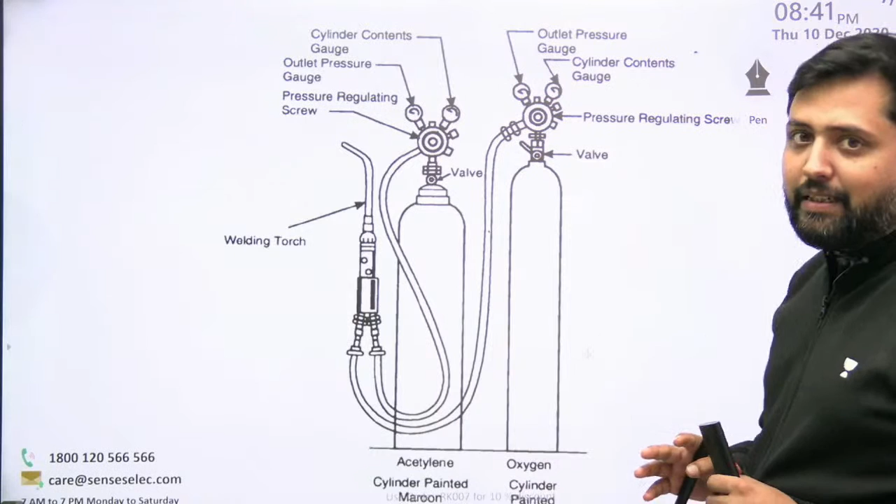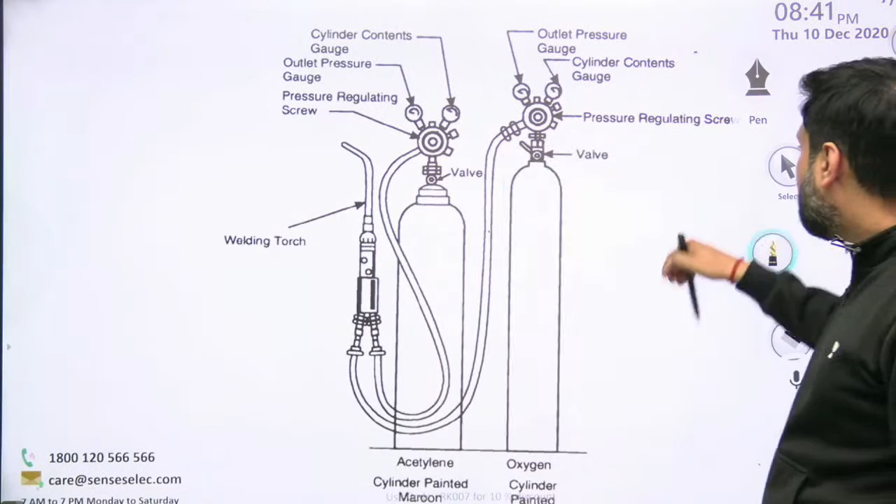That oxygen cylinder will be made black in color. Okay, here right now if you look, this is the oxygen cylinder, this will be made black in color. And if you look at the acetylene cylinder, then the acetylene cylinder will be made red or maroon in color.

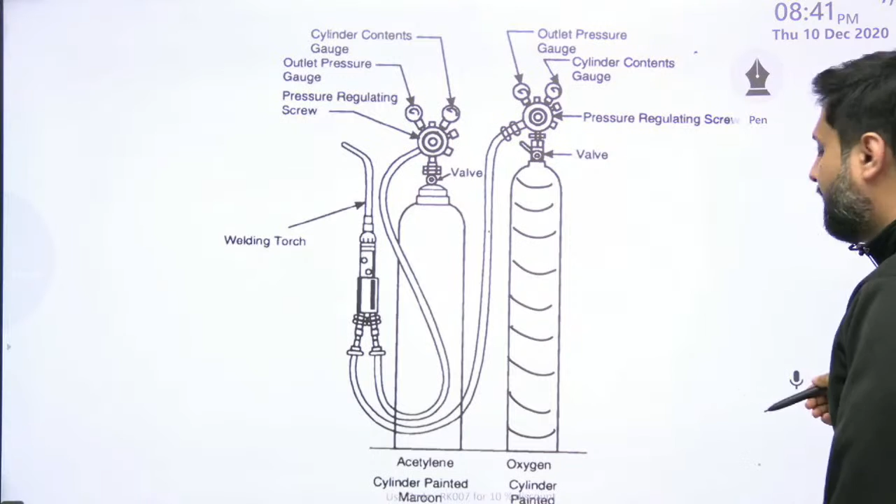Moreover, the oxygen gas is stored in this cylinder, and this cylinder will be made out of brass. You cannot make the oxygen cylinder out of steel, because the problem is if you made it out of steel, it will corrode and the life of the cylinder will be too less. So instead of making it of steel, it is made out of brass.

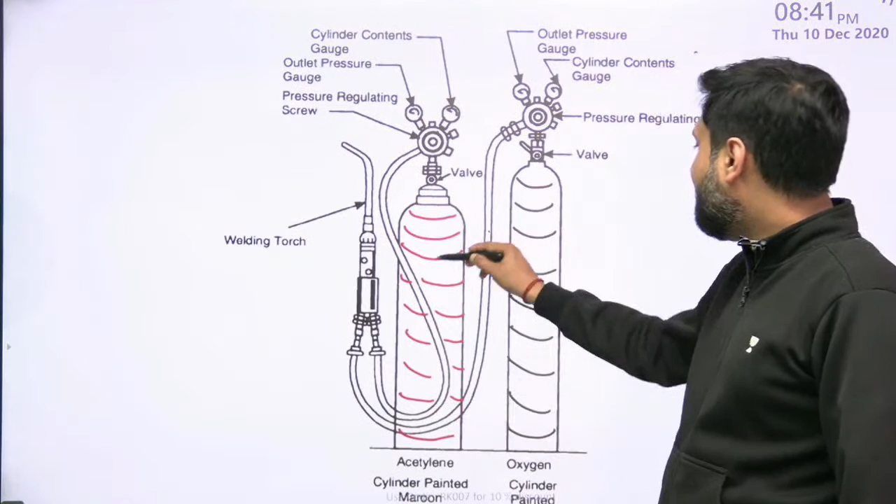While this acetylene cylinder will be red in color and it will be made out of steel. You cannot store the acetylene gas in a brass cylinder because acetylene in itself is highly flammable and explosive. And once you store it in a brass cylinder, it will react with copper and form cuproacetylene, which is further very highly explosive in nature.

So dear students, this acetylene cylinder, which is made red or maroon in color, is made out of steel, and that oxygen cylinder is made out of brass, because if you store oxygen in a steel cylinder, it will corrode it and the life of the cylinder will be very less.

Moreover, how do we get oxygen? Oxygen is actually filtered out from the atmosphere. We take the atmospheric air, we first do the cleaning so that we can remove all those small impurities and particles, dust, everything from it. Thereafter, we heat it in a chamber. Once you heat it, then what will happen?

The lighter gases will go on top, the heavier ones will come to the bottom, and then one by one the valves will be opened so that lighter gases go out, heavier gases go out, and we are left with the three gases which are argon, nitrogen and oxygen.

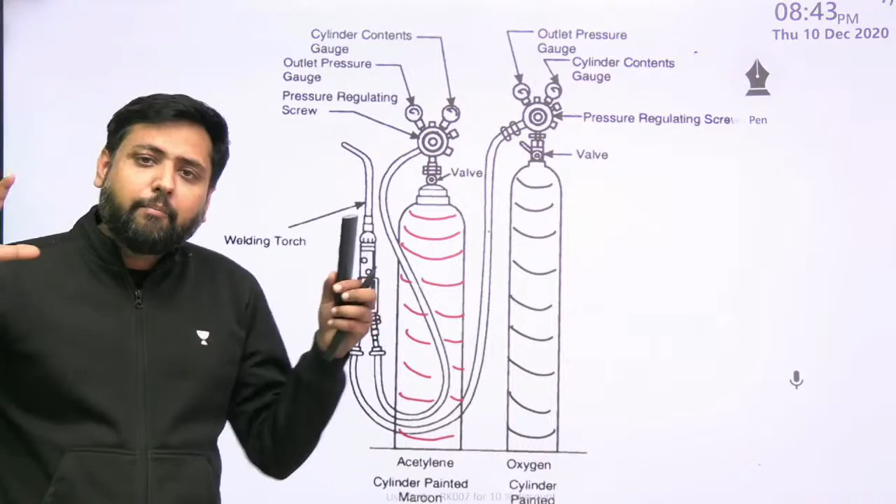Now, these gases are sent into a compressor. In that compressor, it is compressed a lot. Once that compressing part is over, then the gases are intercooled. They are cooled a lot, and then they are throttled. Once you do this throttling, you will get liquid nitrogen, liquid argon and liquid oxygen.

Out of all the three, oxygen will have the highest boiling point. So now this liquid mixture of nitrogen, oxygen and argon will be heated in a controlled way, so that first nitrogen evaporates out, then argon evaporates out, and you are left with liquid oxygen, which will be stored inside this cylinder.

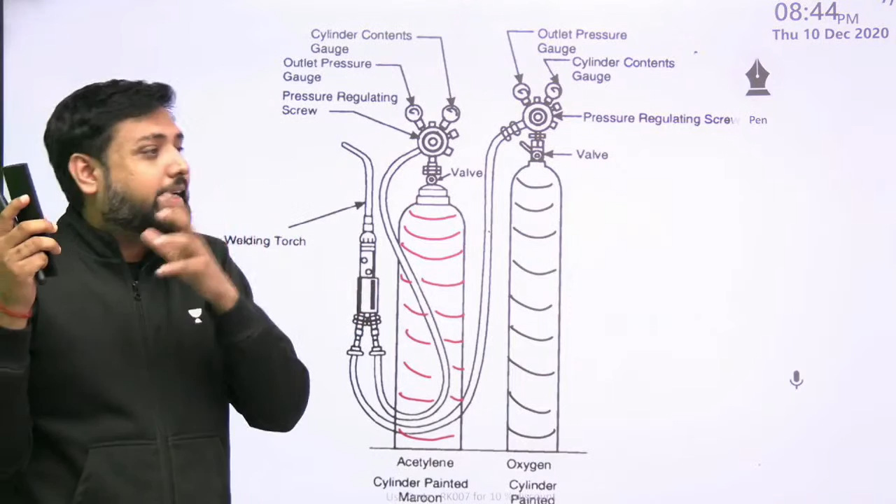How to get the acetylene? We take calcium carbide and react it with water, and that reaction results in the formation of acetylene gas. But the problem with acetylene gas is that it can explode under its own weight.

So acetylene cannot be stored directly into a cylinder. For that, the cylinder in which you are going to fill the acetylene gas under pressure will first be filled with porous calcium silicate. Into those pores, acetylene gas can enter, so that all the gas molecules will not be at the same place and explode.

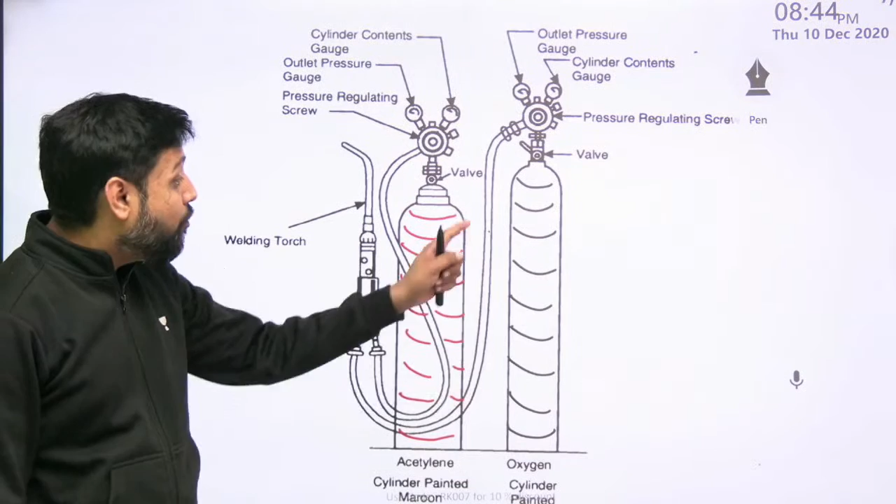Then the remaining space is filled with a liquid called acetone, and acetylene gas is filled into it at a pressure of about 1.3 to 1.4 megapascal, while the oxygen cylinder pressure can be between 12.7 and 13.8 megapascal. Acetylene is always stored in liquid form because more volume can be accommodated in the same cylinder.

This is the setup. You will have pipes coming out from these cylinders. This is the oxygen cylinder. From here, a copper pipe comes out, and from the acetylene cylinder, a rubber pipe comes out, and both of these pipes go into the welding torch shown here.

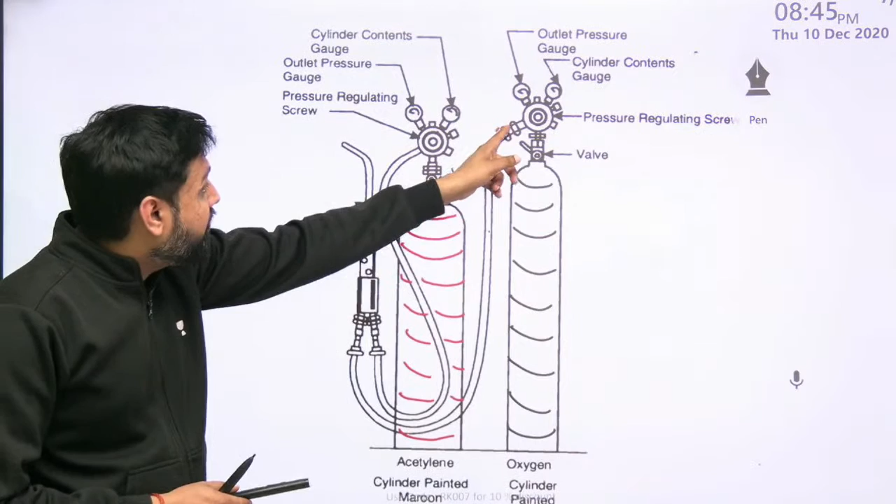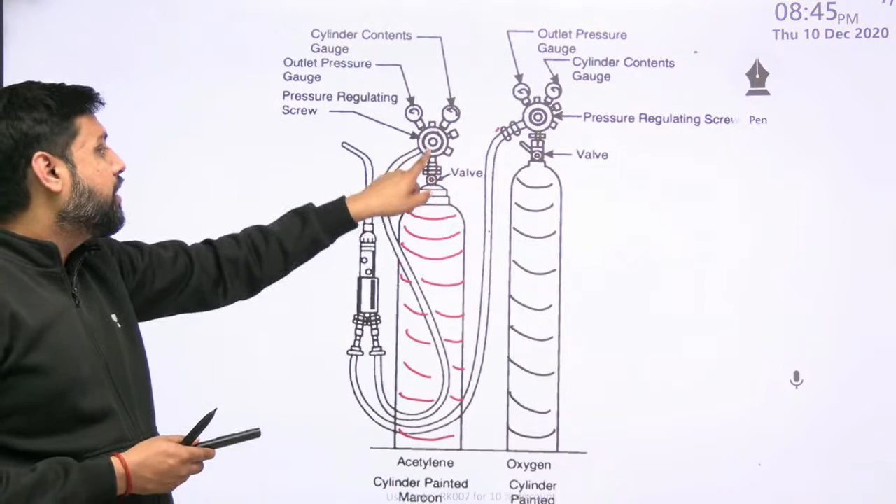The threads where these hoses and pipes are fitted will also be different. Because suppose by mistake this copper pipe fits into the acetylene cylinder, then acetylene will react with copper and it will explode. That can be very fatal for the welders.

So the American Compressed Gas Association, which studies all these compressed gases, decided to change the threads, because a left hand thread will fit with a right hand thread only, or a right hand thread will fit with a left hand thread only.

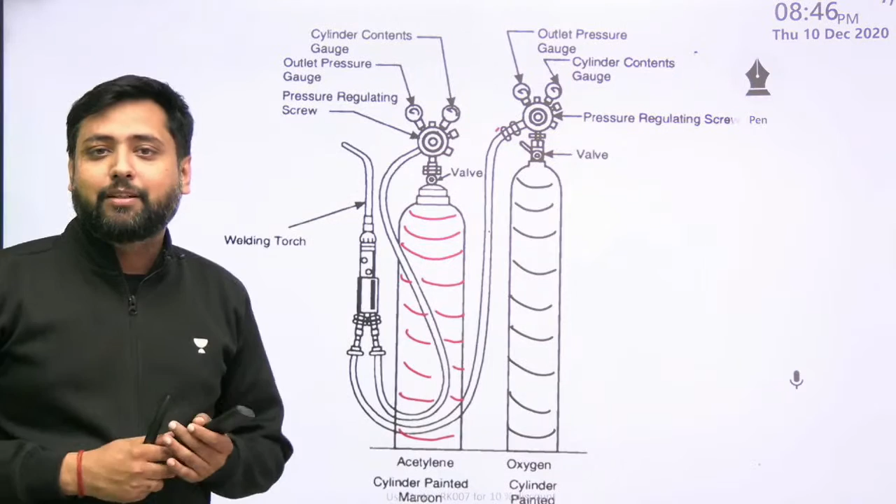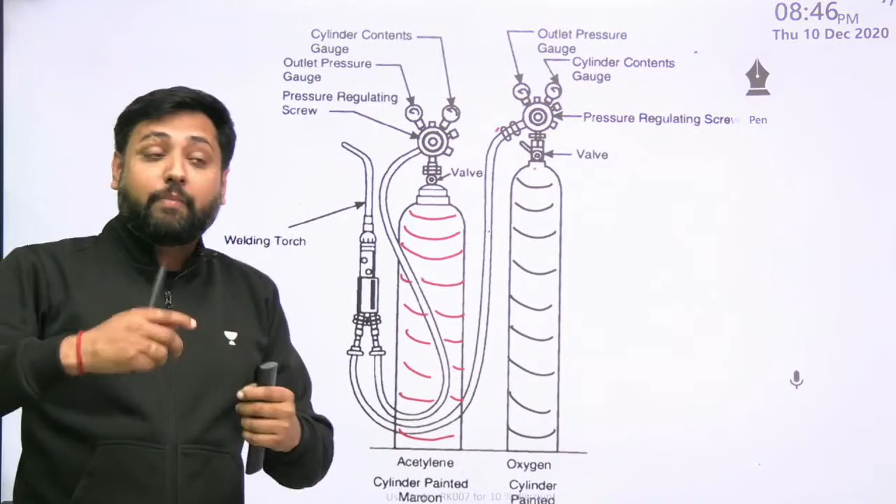So if we make a left hand thread on the oxygen cylinder, this pipe will always have a right hand thread, and the acetylene cylinder will always have a right hand thread. So by mistake you cannot fit it wrong, which keeps the welder safe. Otherwise an explosion can even result in the death of the welder or people nearby.

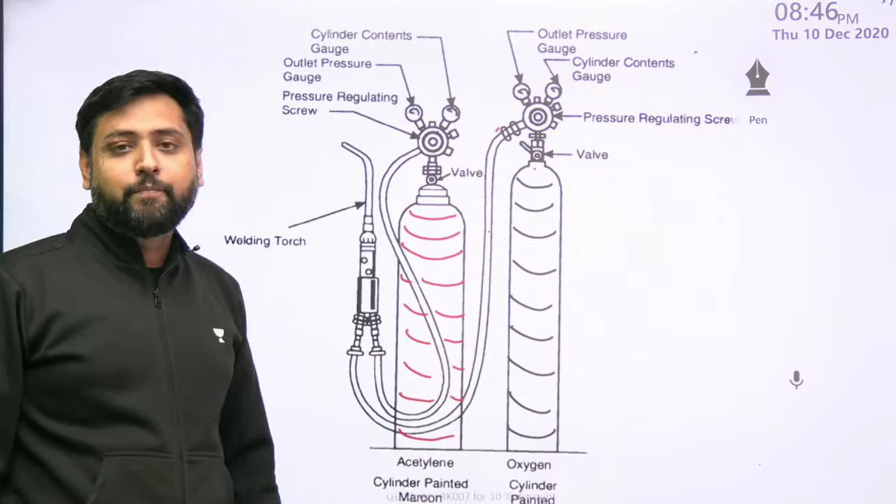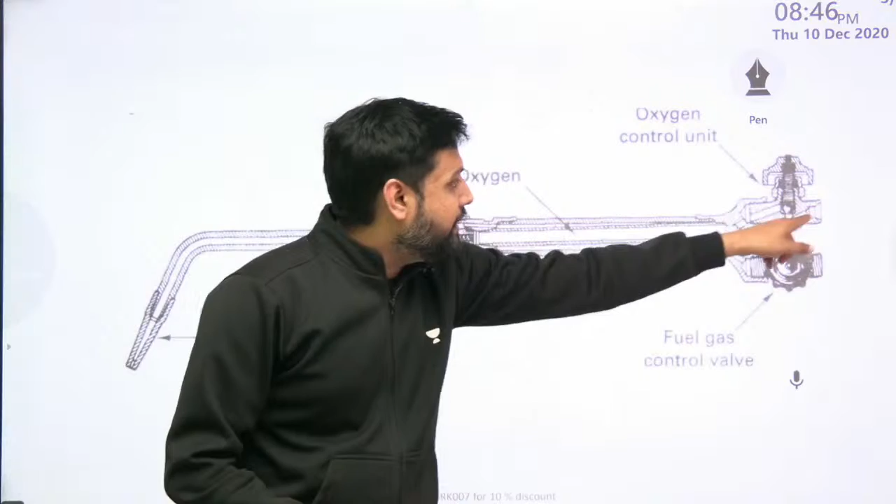This is the setup. Now you have this torch. In this torch, from one side oxygen gas comes in, and from another side acetylene gas comes in, and here you can see the mixing chamber.

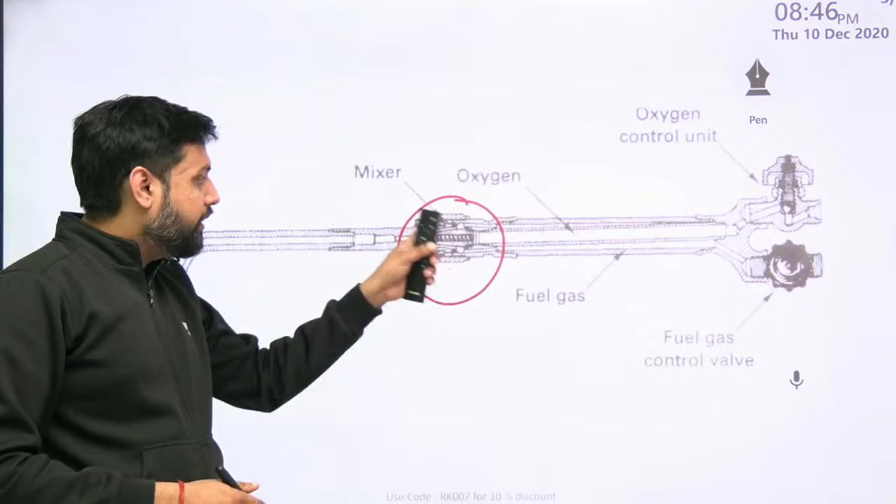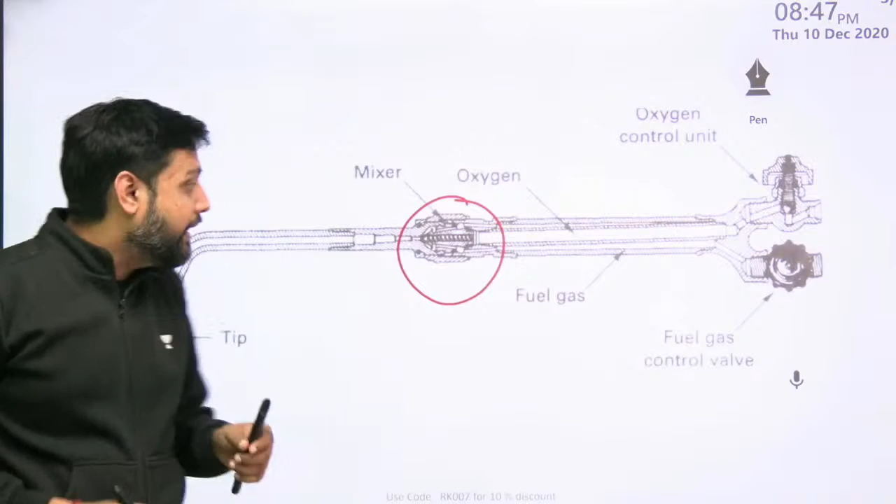This mixer will be a chamber with a diverging shape, not converging, so that pressure increases and mixing occurs thoroughly. Then this mixture passes through and at the tip it becomes convergent, because under the expense of pressure, that mixture of acetylene and oxygen comes out at higher velocity, and then you can simply light it and get this flame.

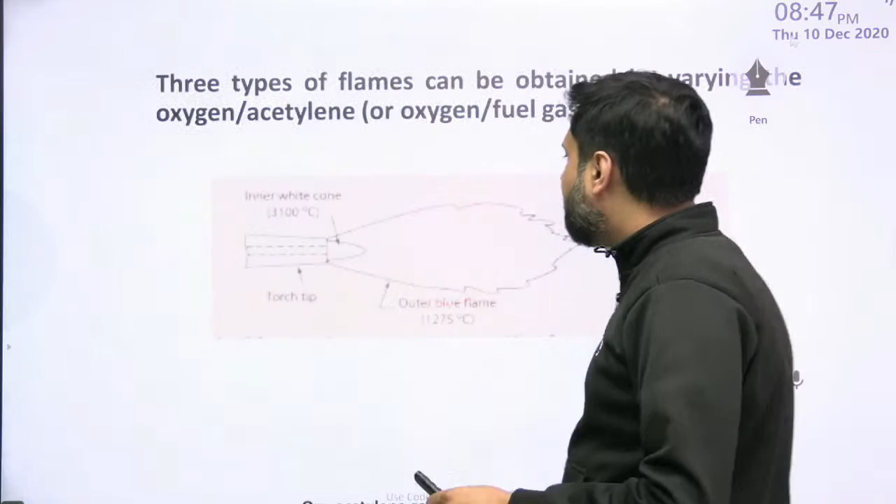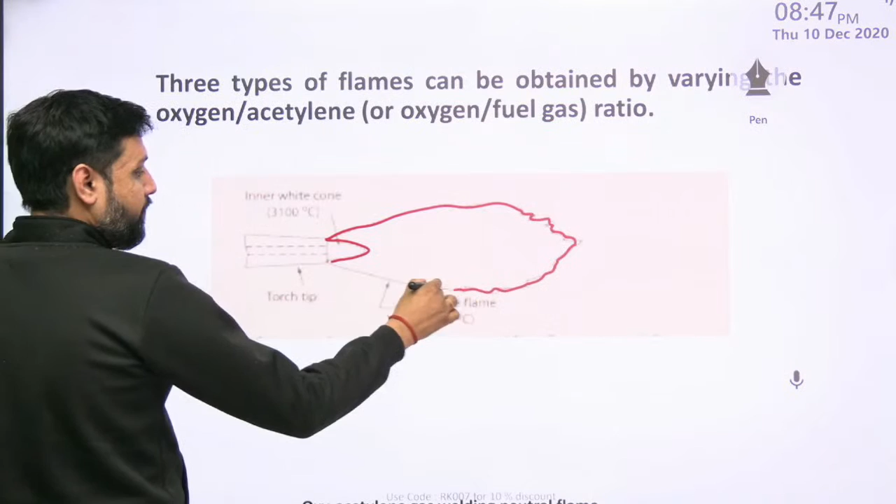If you look at the flame, it can be visualized like this. There is an inner cone of the flame and an outer cone of the flame. When these gases come out, the mixture of acetylene and oxygen, you know what happens?

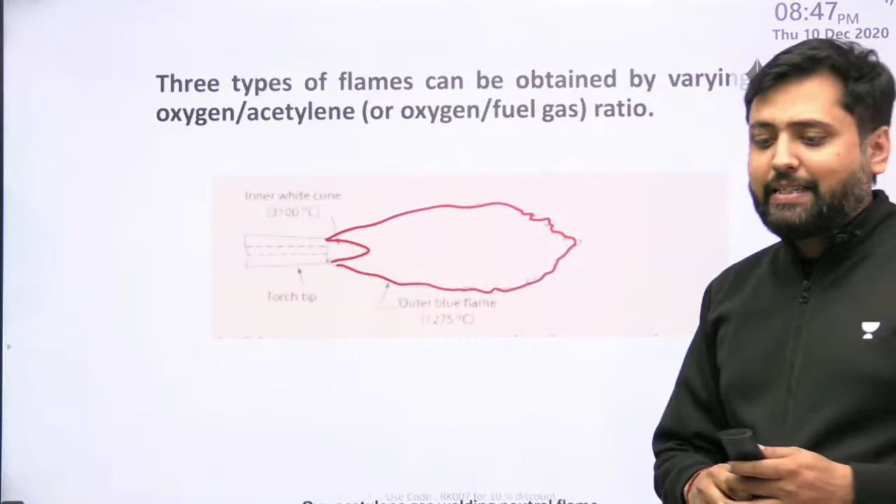The acetylene gas burns in the presence of oxygen in two stages. What are those stages? Let me show you. In the first stage, what happens?

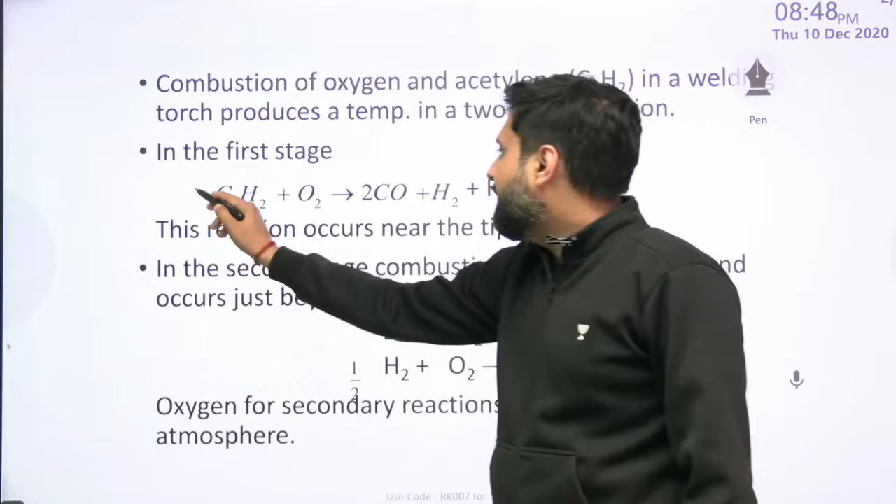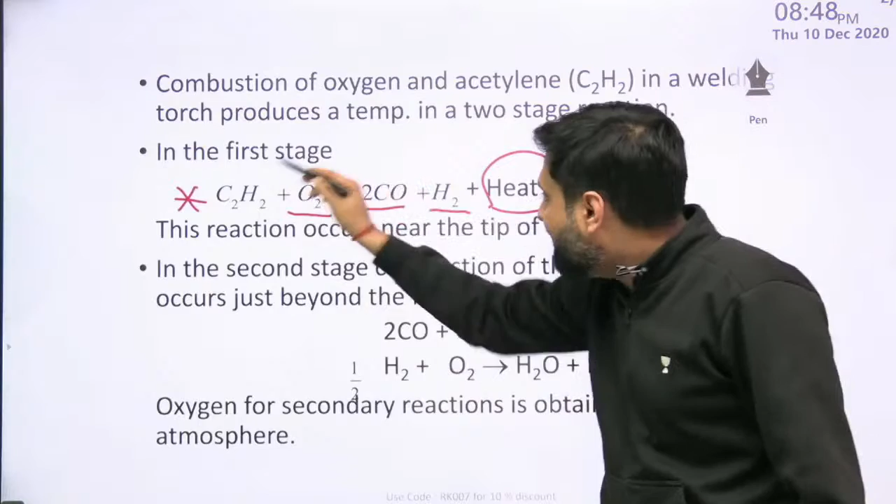This acetylene gas burns in the presence of oxygen supplied from the cylinder. In the presence of this cylinder oxygen, C2H2 burns and produces carbon monoxide and hydrogen gas, plus heat is generated, and this burning results in the formation of the inner cone.

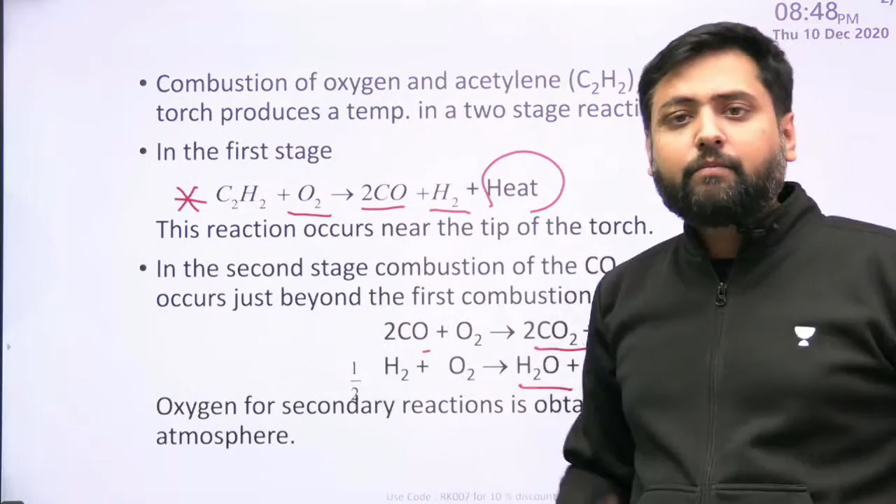Then in the second stage, 2CO plus O2 forms carbon dioxide, and hydrogen and oxygen form water vapor, then heat. This is the second stage reaction, and whatever oxygen is required here is not obtained from the cylinder, but from the atmosphere.

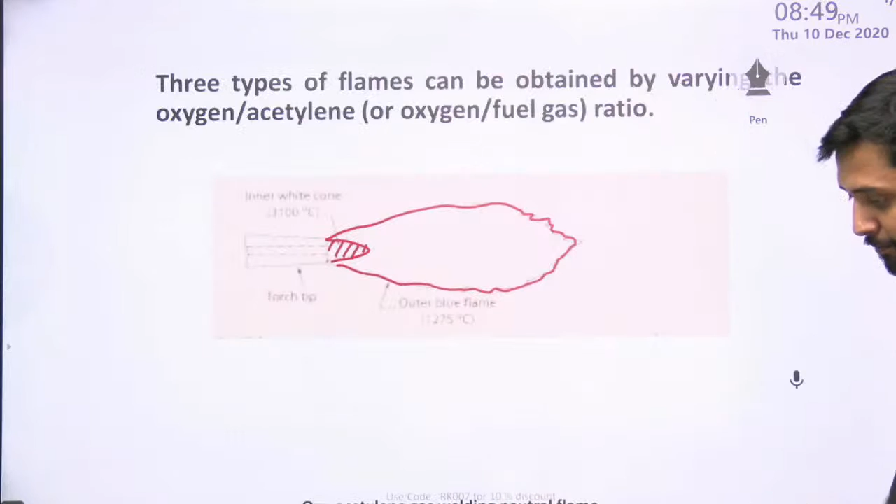This second stage reaction results in the formation of the outer cone. Now, the temperature at the inner cone and the outer cone will depend upon the ratio of acetylene to oxygen that you have used.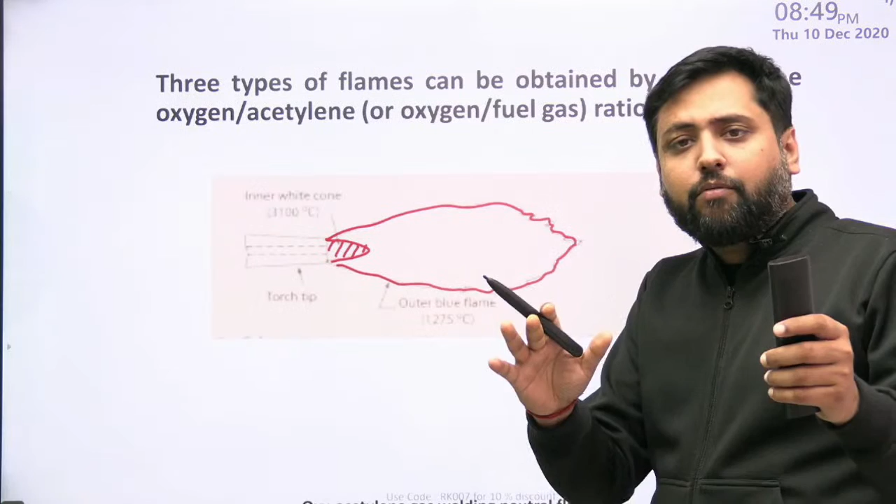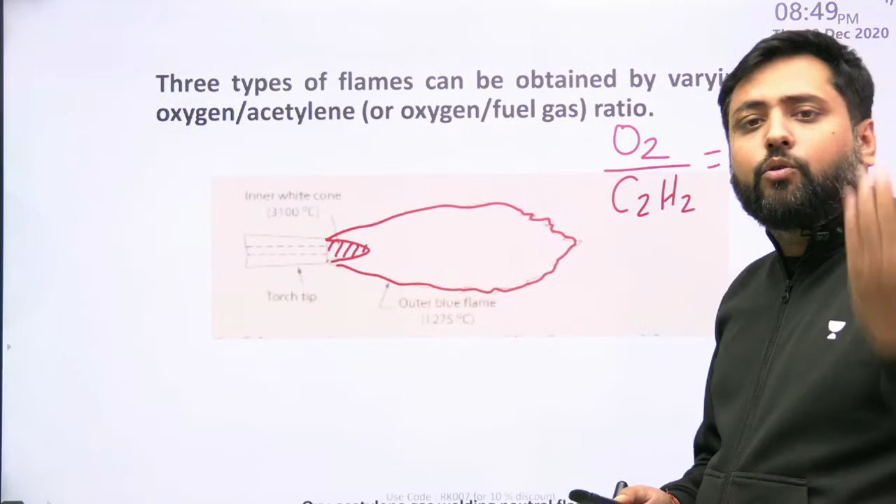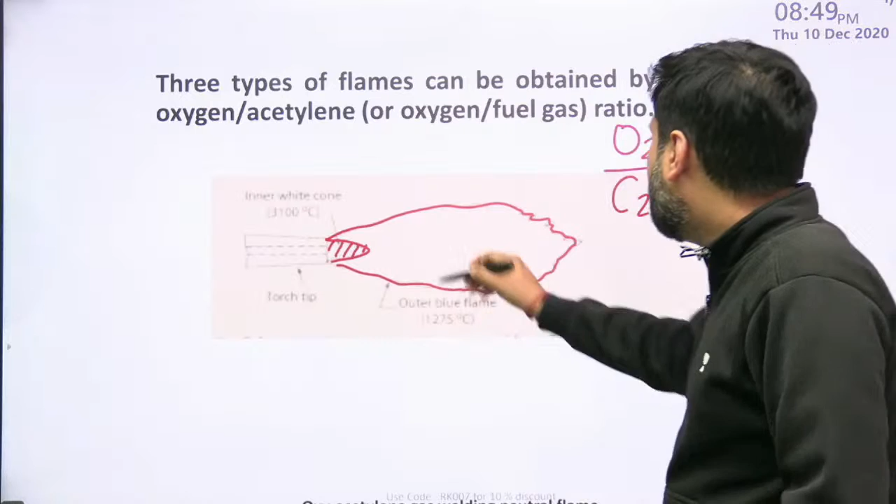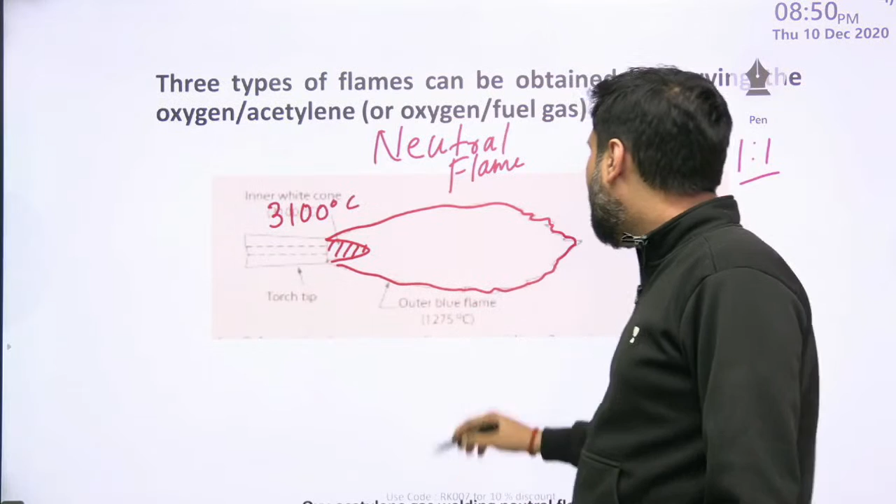Suppose you are using the same amount of oxygen and acetylene, a 1:1 ratio. Then this type of flame will be called a neutral flame. Since enough oxygen and enough acetylene are present and equal in amount, there will be no extra carbon or oxygen after the reaction completes. This neutral flame will never carburize nor oxidize the region being welded, so it is the one flame which is mostly preferred. In case of neutral flame, the temperature at the inner cone will be about 3100 degrees centigrade, while the temperature at the outer cone will be about 1275 degrees centigrade.

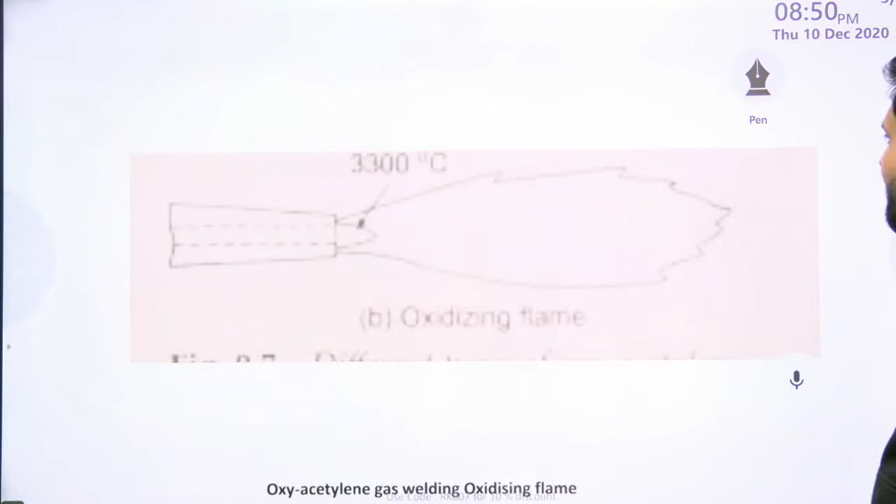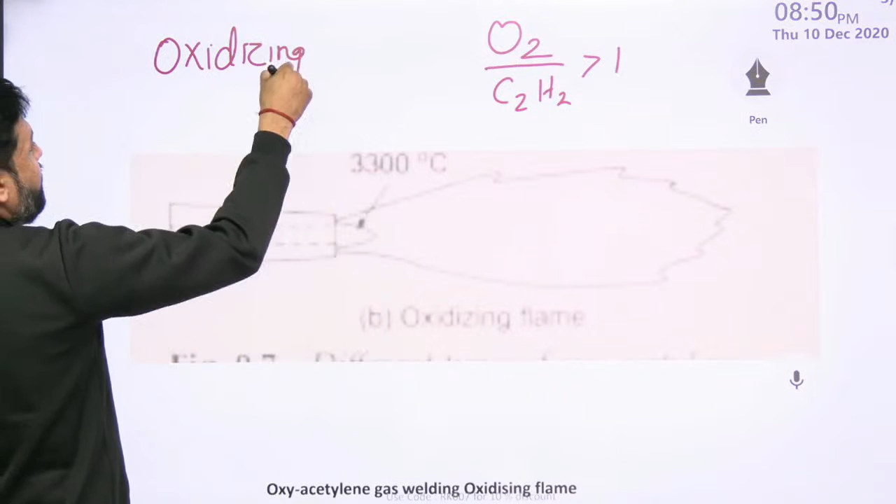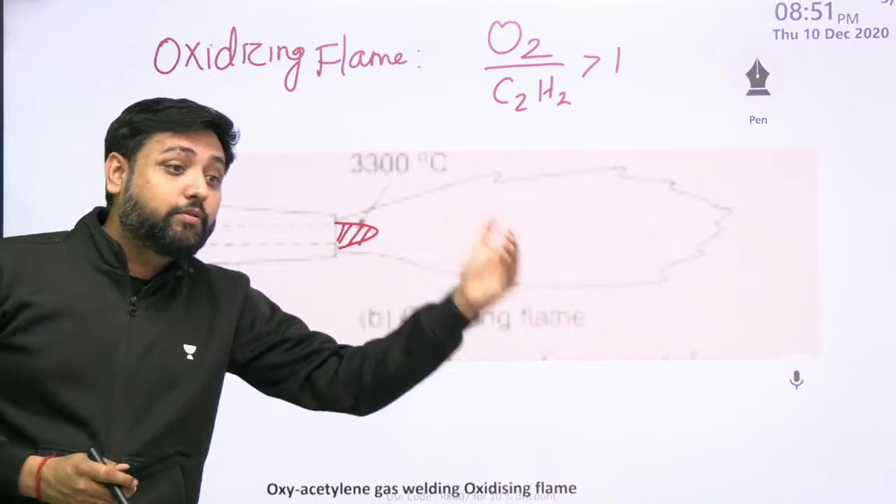Now suppose O2 is more and C2H2 is less, so this ratio is greater than 1. This type of flame is what we call an oxidizing flame. In this case, oxygen will be more, acetylene will be less, and reactions will happen at a faster rate. The inner cone length, compared to the neutral flame, will also be very small compared to the neutral or carburizing flame. Why? Because more oxygen is there, burning happens at a higher rate, so the inner cone length will reduce.

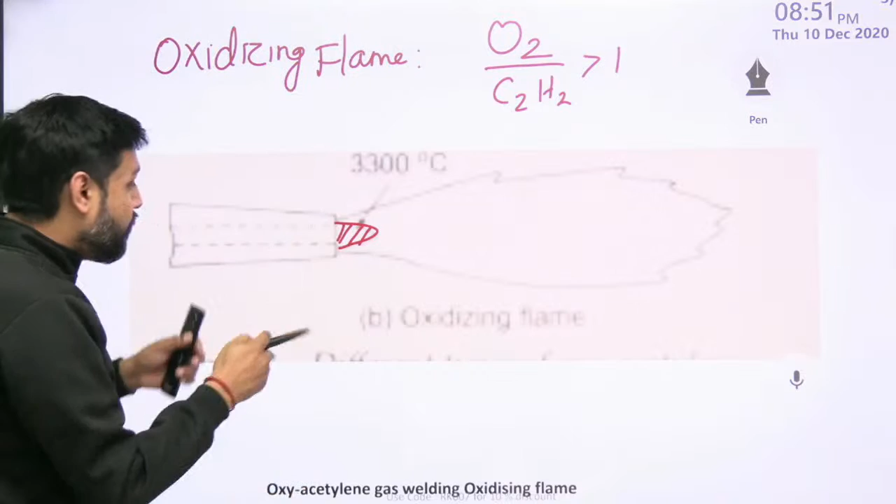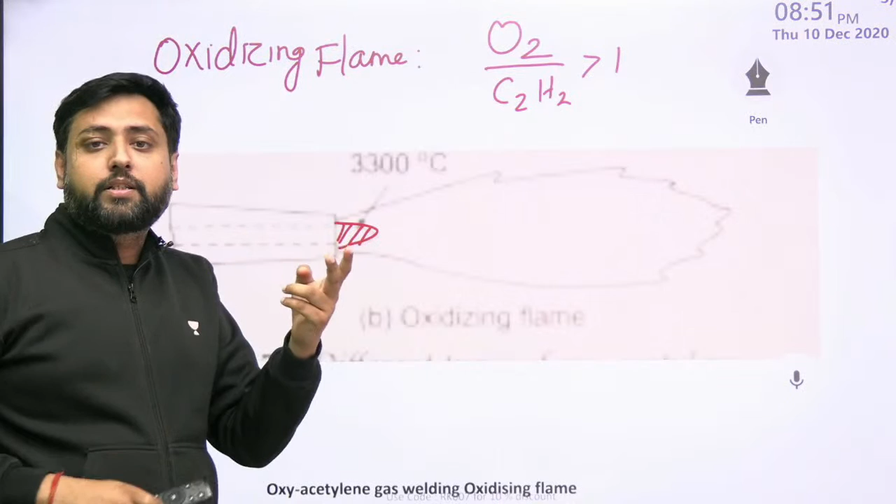Since burning is happening at a very high rate, the temperature at the inner cone will be the highest out of all three flames: carburizing, neutral, and oxidizing. Here the temperature can be as high as 3300 to 3400 degrees centigrade, while the temperature at the outer cone will be about 1350 degree centigrade.

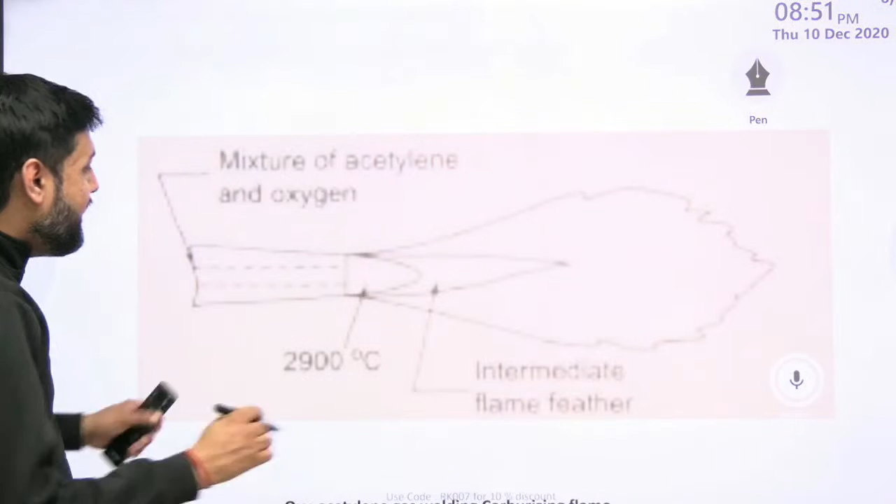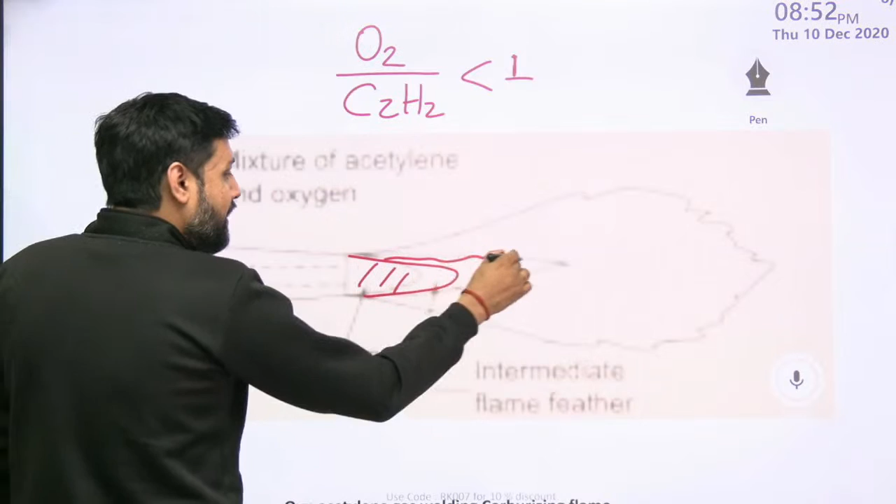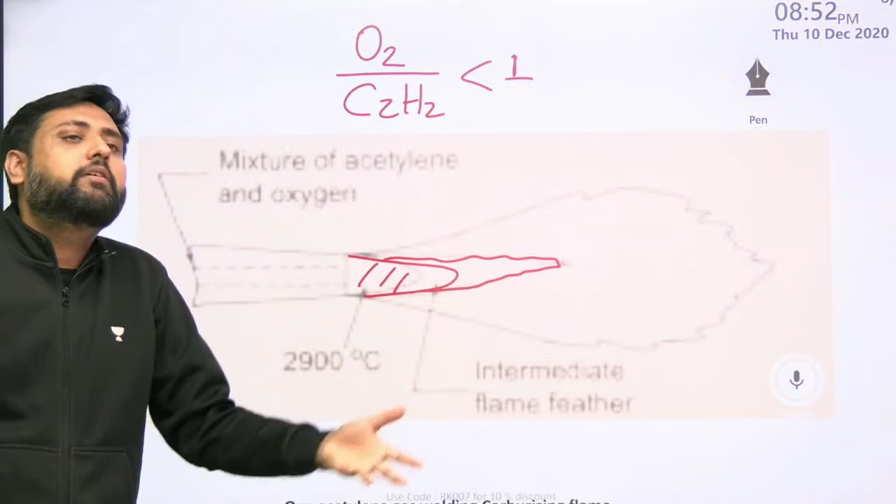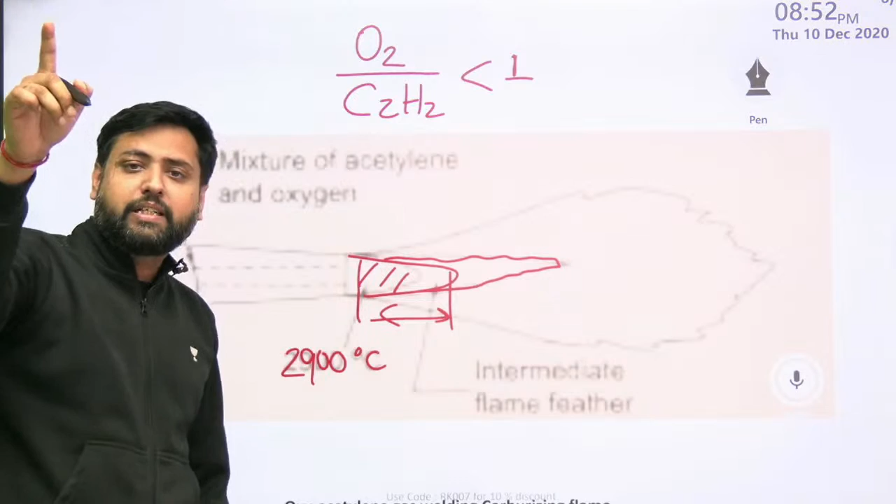Now what happens if oxygen is less and acetylene is more? This ratio results in what we call a carburizing flame. In this case, the length of the inner cone will increase, and even some intermediate cones can form, because oxygen is less and burning will not happen perfectly. So apart from the inner cone, some extra cone may also appear, though not every time. The length of the inner cone will be the highest compared to any other flame. Also, the temperature will be the least, because with less oxygen burning happens at a very slow rate. So the temperature in carburizing flame will be the least of all flames, highest for oxidizing, and in between for neutral flame. The temperature at the exterior cone will be about 1200 degrees centigrade, and it can even be lesser than that.

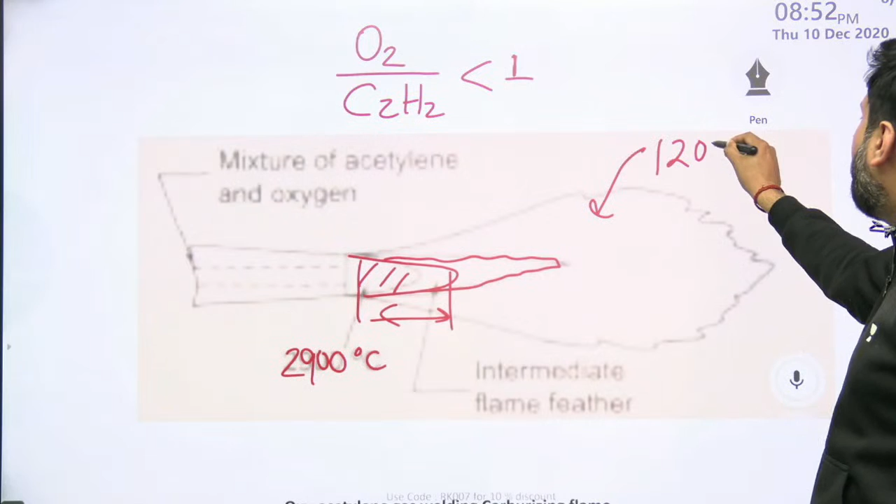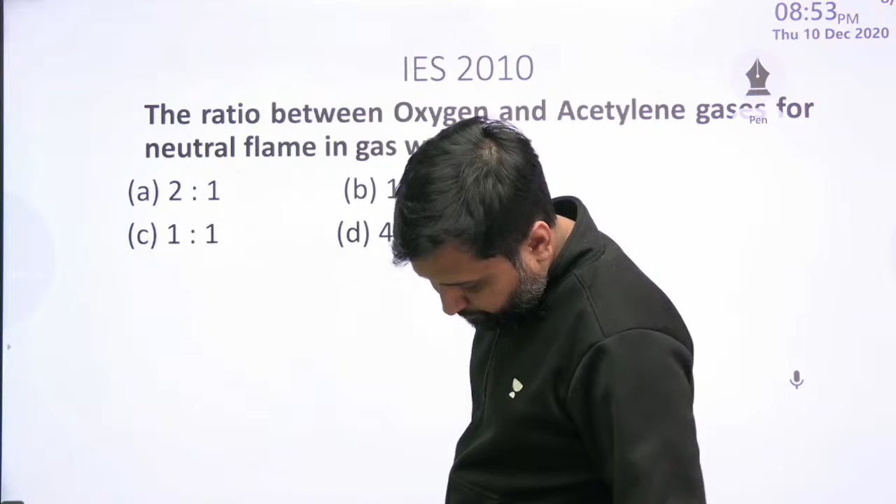Now this was all about gas welding. I have given you the overview of gas welding in a very perfect manner. The ratio between oxygen and acetylene gases for a neutral flame in gas welding is equal to 1:1.

Now let us take the next question. Just a minute, dear. Hold on for a while, just a minute. Guys, I'll take just a minute.

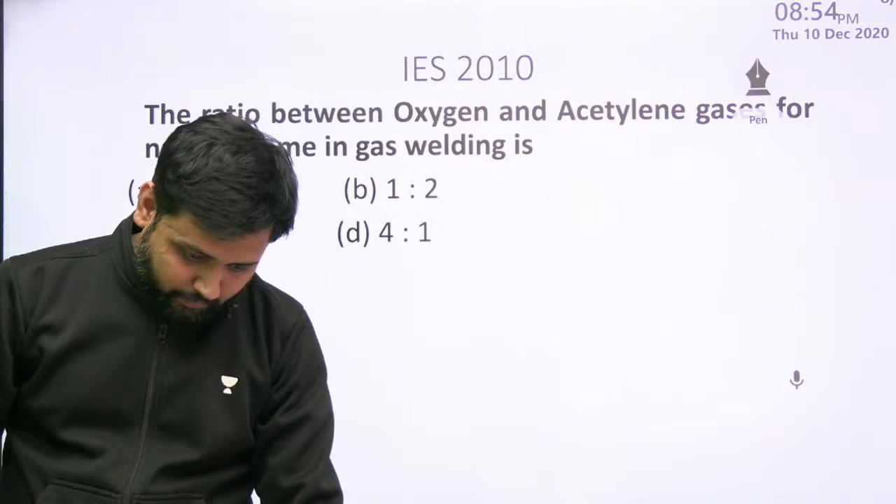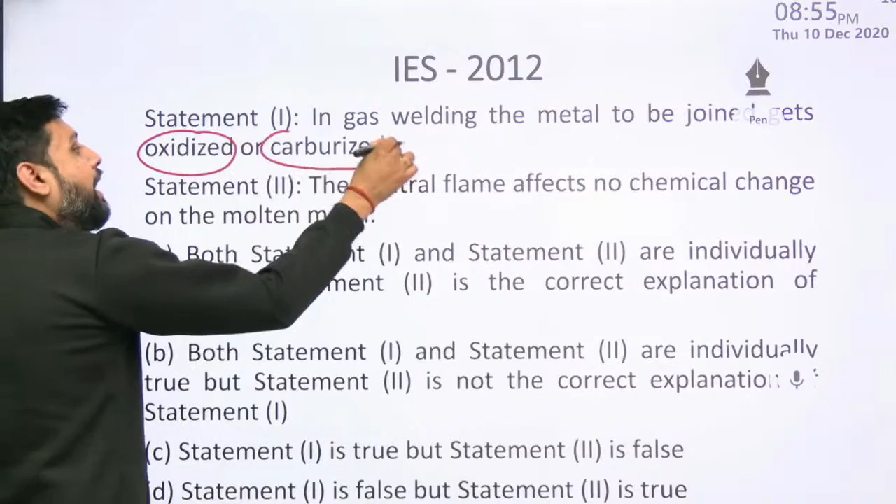In gas welding, the metal to be joined gets oxidized or carburized, but do you think it will always oxidize if the flame is oxidizing? It will carburize, the surface will be enriched with more carbon, in a carburizing flame. But what if it is a neutral flame? Neither oxidation nor carburization, meaning no deoxidation or decarburization will take place. So this statement is only true for oxidizing and carburizing flame, not for neutral flame. The statement becomes wrong, and the answer becomes D.

You all know about assertion-reason questions, but let's look at statement 2: the neutral flame affects no chemical change on the metal. Yes, true, it will neither oxidize nor carburize. So statement 2 is correct, and we will have the answer as D.

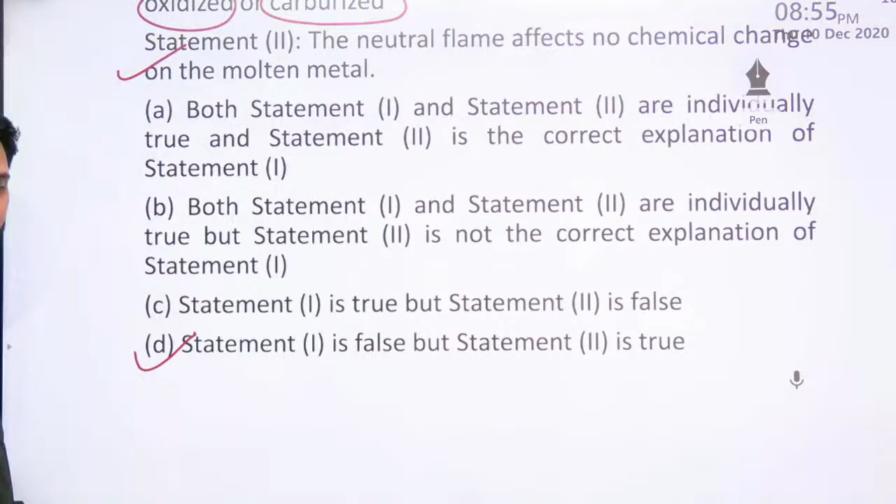Consider the following statement: for oxy-acetylene welding, the joint is not heated to a state of fusion. No, the joint is heated to a state of fusion. By the way, what are they saying in the last?

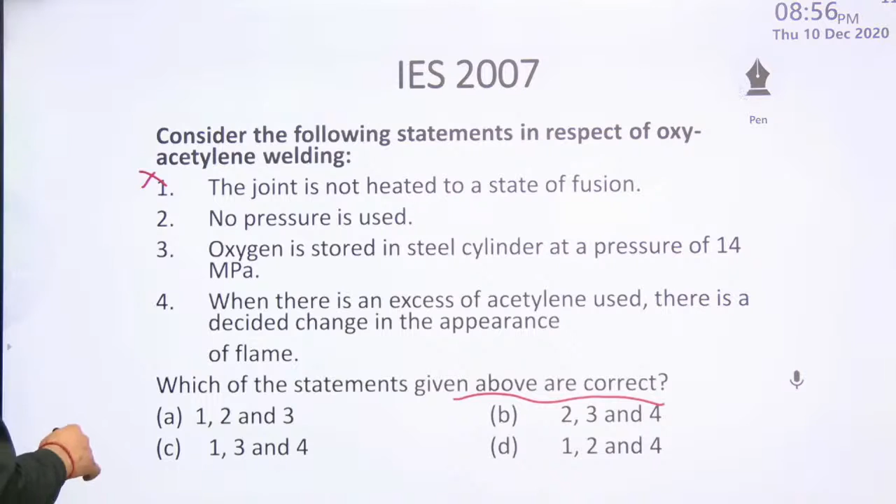Which of the above are correct? This is incorrect, no pressure is used. Yes, this is correct, this is a fusion welding process. Remember, in arc welding and gas welding, we don't use any pressure.

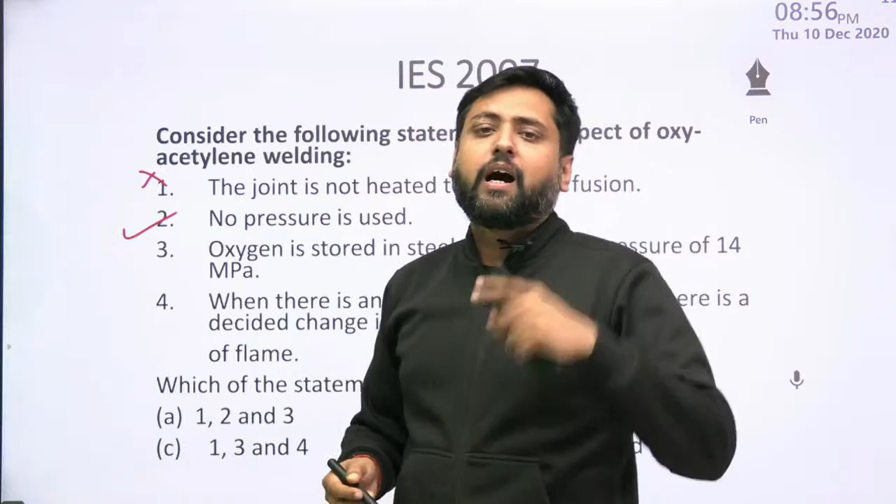Where do we use pressure? Resistance welding, we use pressure. Friction welding, we use pressure. Ultrasonic welding, we use pressure. And by the way, arc welding and gas welding, we use only heat, no pressure.

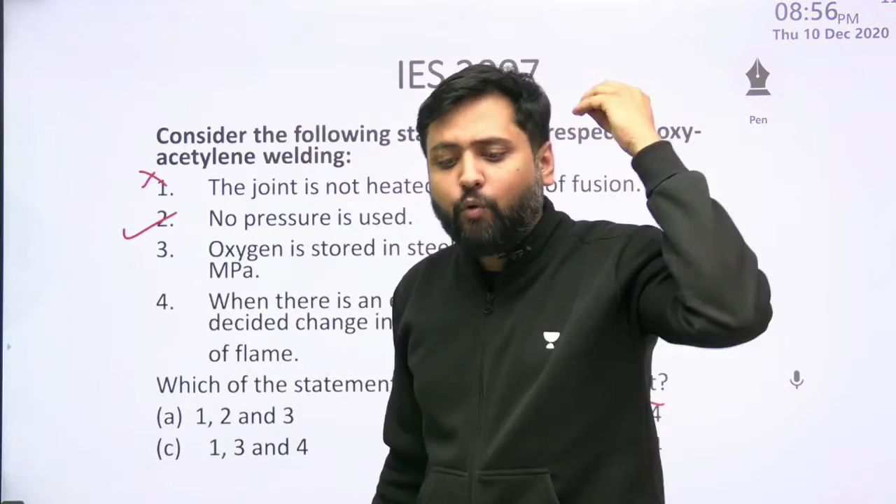Now, both heat and pressure are used in what processes? Friction welding, both heat and pressure. Ultrasonic welding, both heat and pressure. Resistance welding, both heat and pressure.

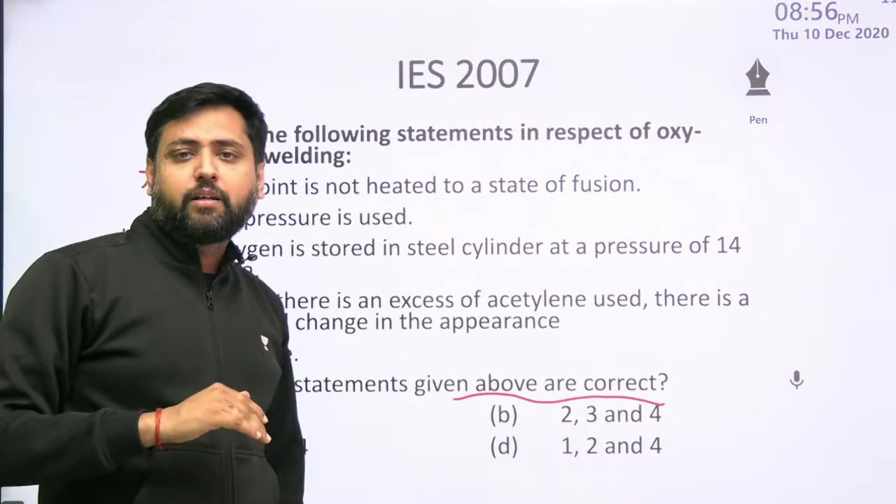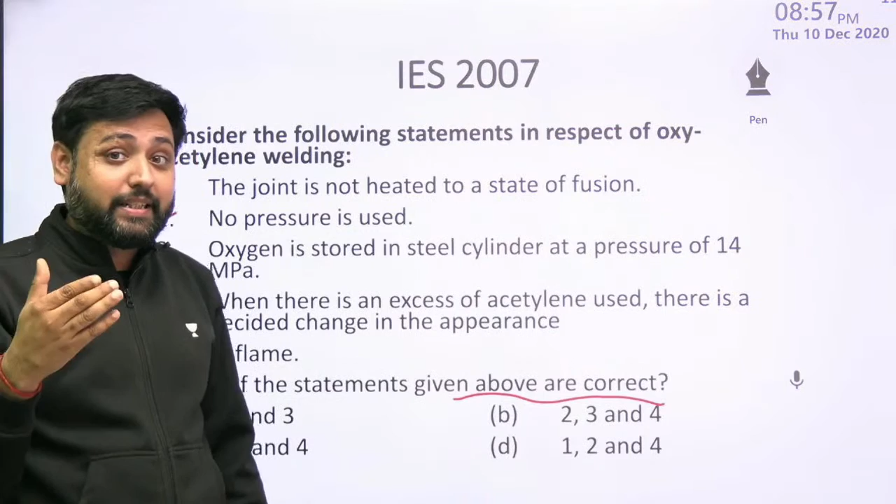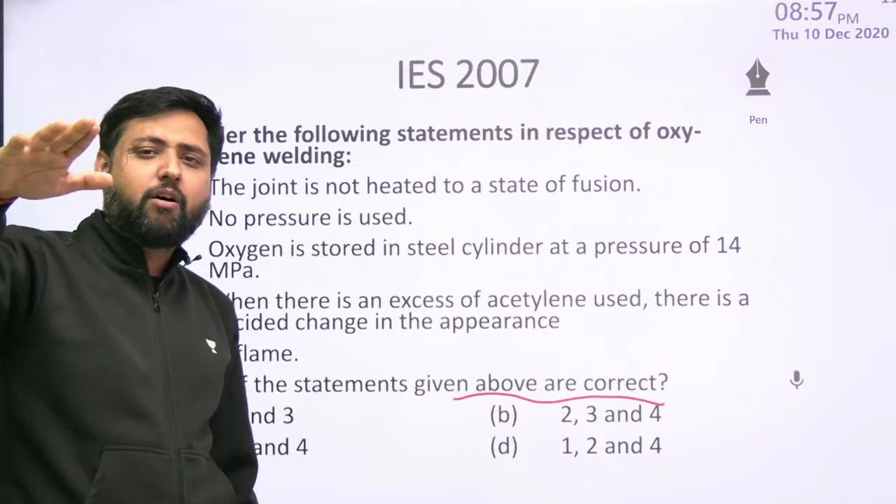Now, if I ask you, can you name any process in which we don't use any heat, we use only pressure? Yes, that process is explosion welding. In explosion welding, no heat is applied or generated at the interface of the two pieces being welded. Only pressure will be there, and welding occurs due to interlocking of the metals with each other.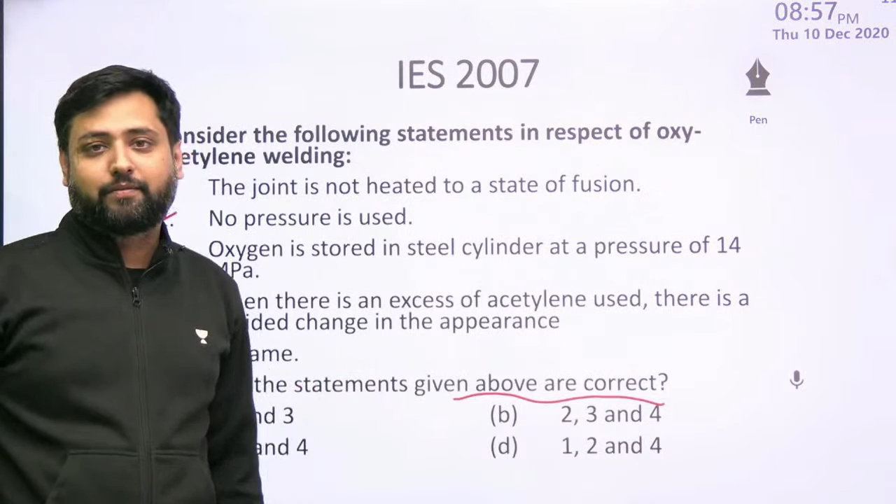Yes, that is a different process. By the way, this third statement is correct: oxygen is stored in a cylinder at a pressure of 14 megapascal. Yes, I told you 12.7 to 13.8 megapascal, which is very near to 14 megapascal.

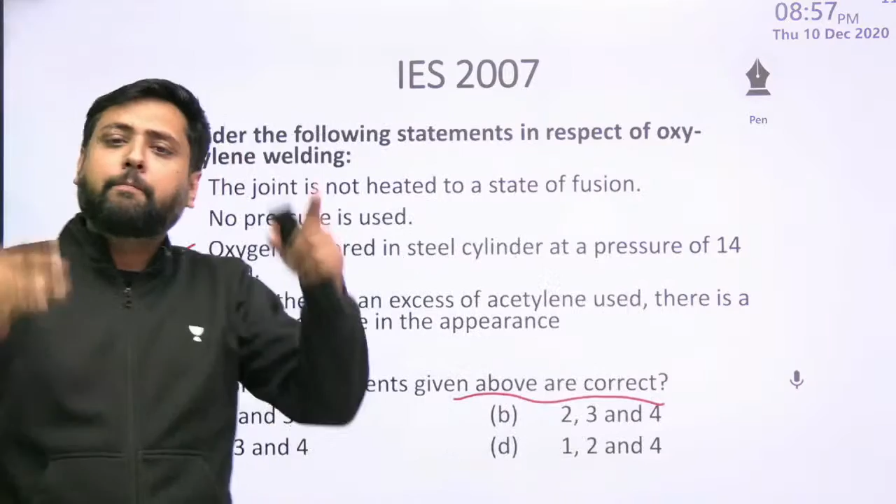That statement is correct: when there is an excess of acetylene used, there is a decided change in the appearance of the flame. Yes, by changing the ratio between oxygen and acetylene, the appearance of the flame will change. So this statement is also true.

Let us find where 2, 3, 4 are. 2, 3, 4 are correct. So the answer will be B.

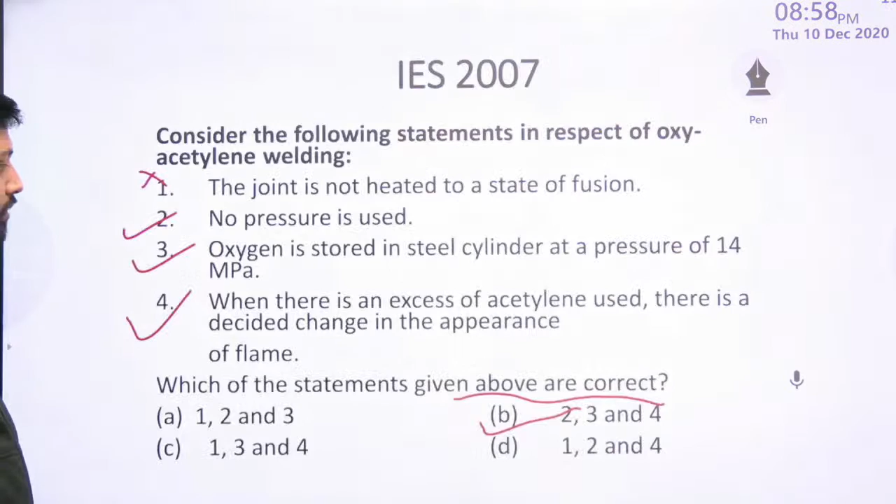The question that was there: if for complete combustion of acetylene, how much oxygen is required? How much oxygen is required? What will you answer, anyone? I can see you in the comment section. For complete combustion of acetylene, how much oxygen is required?

Sound is not clear, who is saying that? Saidul Alam is saying that, let me see.

Okay, in the comment section I am waiting. For complete combustion of acetylene, how much oxygen is required? Or let us say for complete combustion of 1 liter acetylene, how much oxygen is required? You would have done this in chemistry in your 11th and 12th year. Anyone?

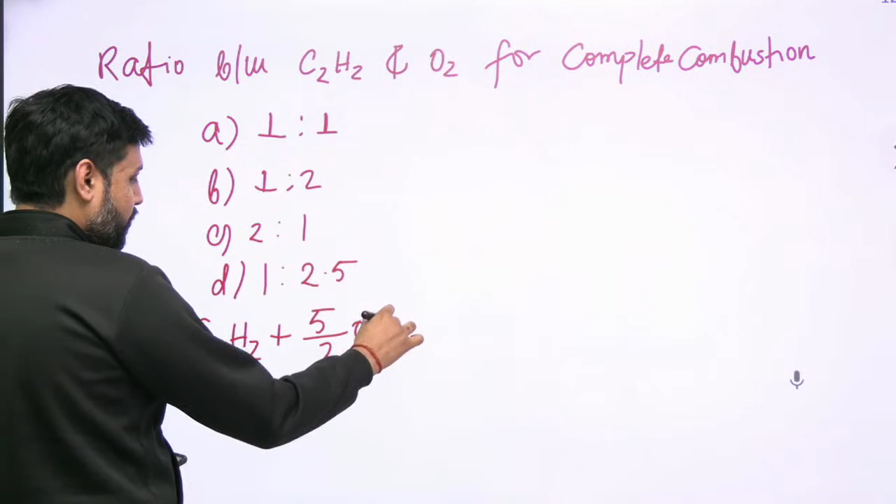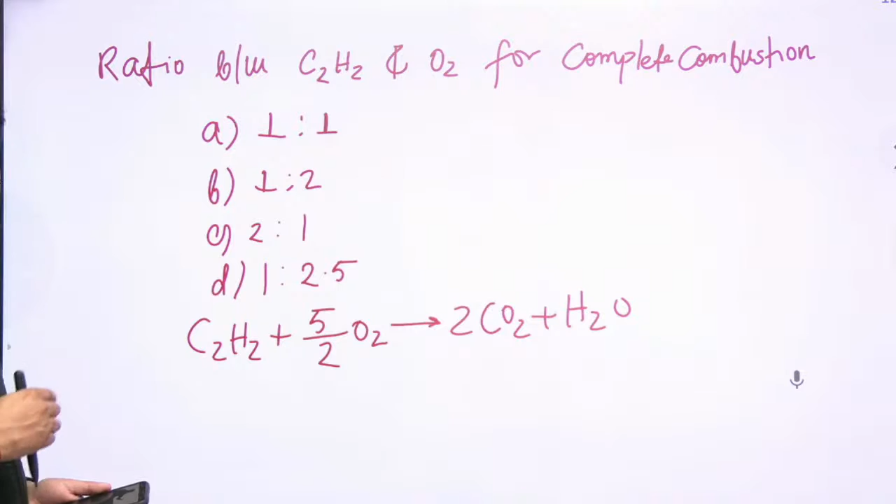So I want to know. Yes, great Saidul Alam, great, great, what did you do? C2H2 plus 5/2 O2, this reaction is going to produce what? 2CO2 plus H2O. Yes, I hope this reaction is balanced, and you all know that molar ratio and volumetric ratio will be the same. Here, 1 mole requires how much? 5/2, which is 2.5. So the answer will be D.